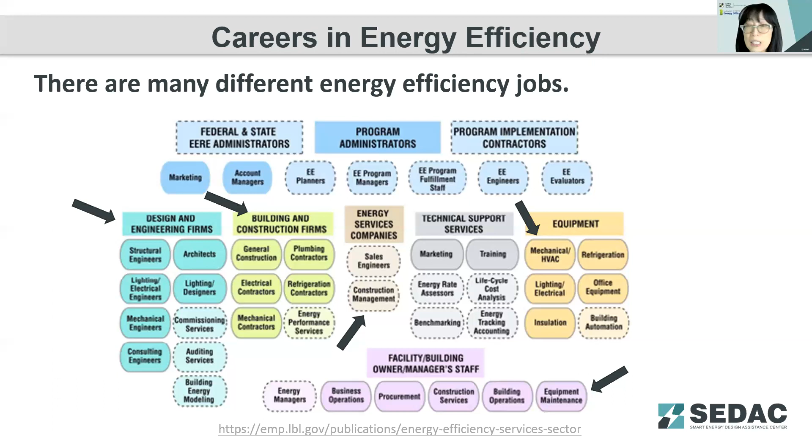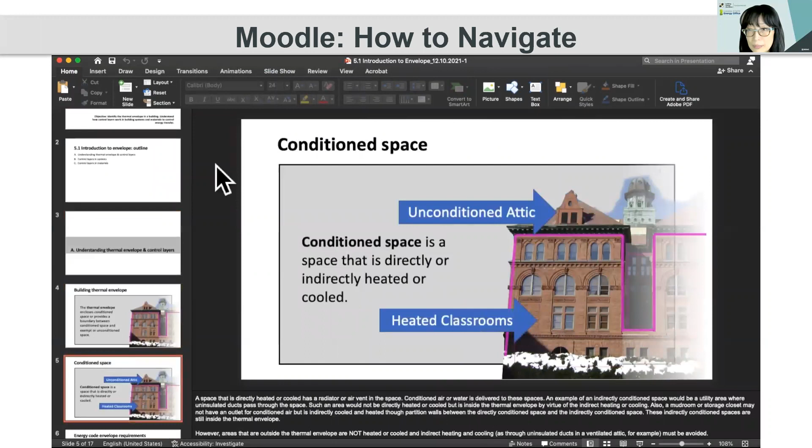Activities for this module are located in a special Activities folder. Worksheets can be assigned as homework or in-class activities. We've created a review game based off the popular TV show Jeopardy! This is a building control layers activity where students are encouraged to practice reading construction drawings and identifying control layers. There's an online quiz that students can take to demonstrate they have learned the material in the module. Students who receive a score of 70% or higher receive a certificate of achievement.

Have questions about our curriculum or how to use it? Check out our Q&A page where we address common questions, including what this program is about, what kind of content we include, how you can use the materials, and how you can contact us if you have questions.

That shows you a little bit of how you can navigate. I thought it would take time for me to navigate on the spot, so we just filmed a little video to show you how to navigate the Moodle, where you can find a lot of resources.

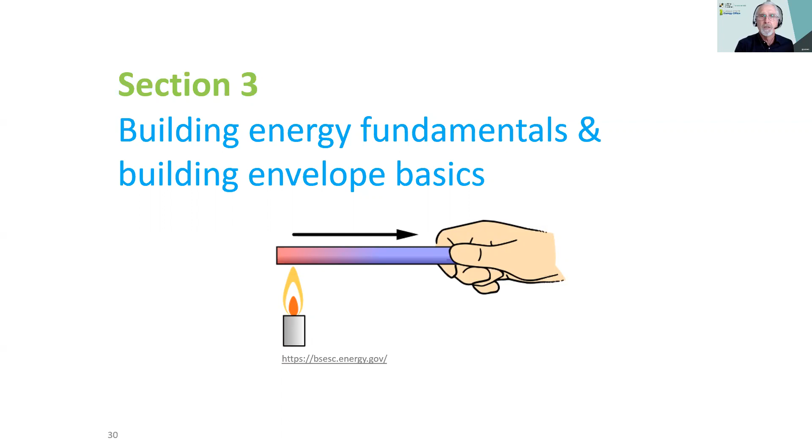So for the next bit of time here, I'm going to provide some highlights from several of the modules that Sumi just described. The first will be some of the building energy fundamentals and envelope modules. The goal here is to share some useful information today, but there's a lot there that we can't get through, of course. So I also want to give you a taste of what's there and inspire you to check out the full modules for more details on topics you find interesting.

So the first one is Module 2, Part 1, Understanding Energy and How It Moves. One basic concept that a lot of us are familiar with is the relation between energy and power. Power is the rate of energy flow, and it's equal to energy divided by time. Another way of looking at that is that power times time equals the energy used. So a kilowatt is a common unit of power, especially used for electric power. And if we have an appliance that uses 1 kilowatt of power and we run it for 1 hour, then we have consumed 1 kilowatt hour of energy.

Now, this may be obvious to you, but it's pretty common that people get these terms mixed up. So now you know.

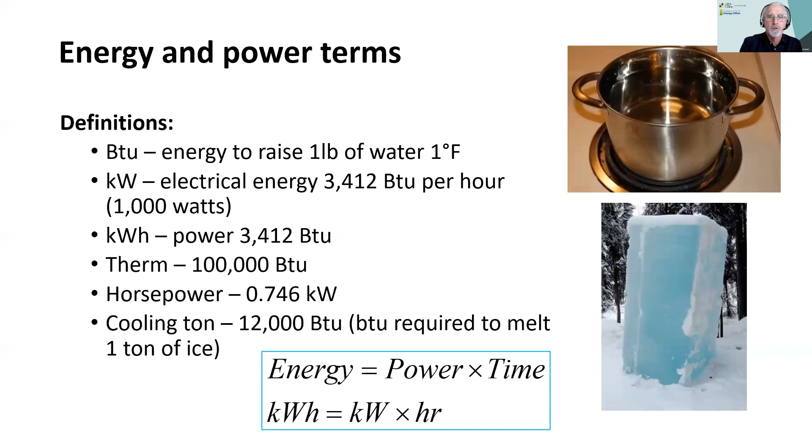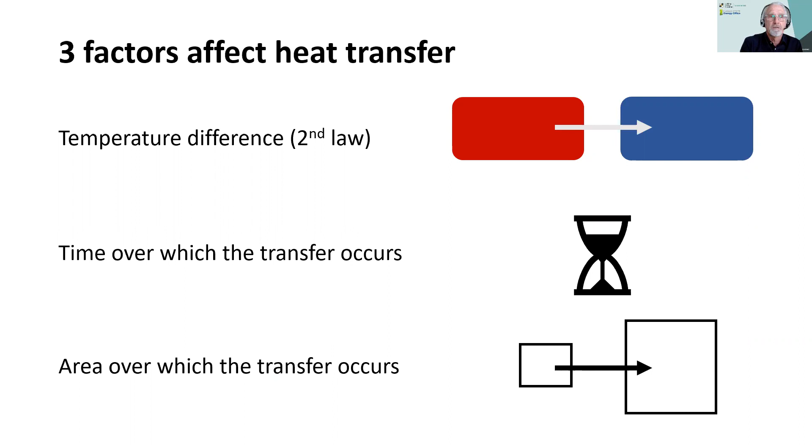Another aspect of the fundamentals is heat transfer. Knowing a bit about heat transfer can help us understand and evaluate different insulation systems and energy systems in buildings. Here are 3 factors that affect heat transfer: the temperature difference, the time over which heat transfer occurs, and the area over which that heat transfer occurs.

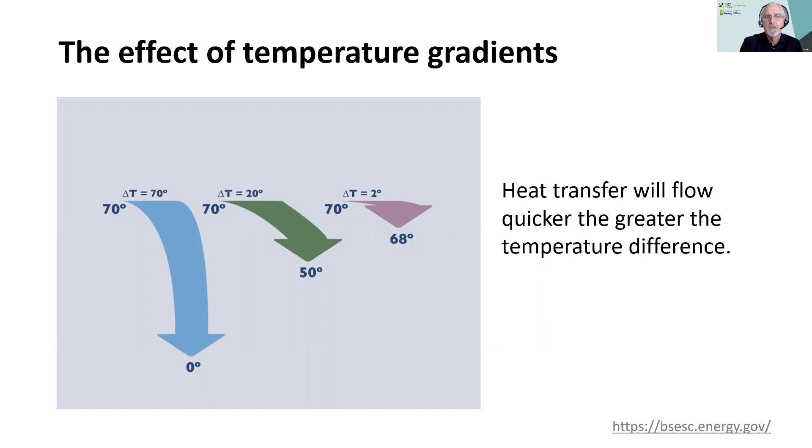The greater the temperature difference, the greater the heat transfer. We're often talking about the difference between indoor and outdoor temperature. This graph shows 70 degrees inside and 0 degrees outside. That's not so applicable to Hawaii, of course, but you also get heat gain when the temperature outdoors is higher than the temperature indoors on a hot day.

The greater the time, the greater the heat transfer. So if you have a rate of 100 BTUs per hour of heat transfer, then over 3 hours, you've accumulated 300 BTUs, of course.

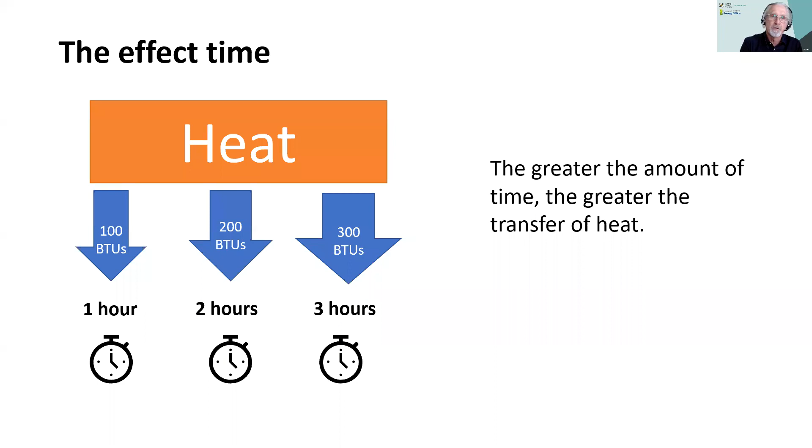And then the larger the surface area, the more heat transfer. So if you have twice as much surface area, then you have twice the rate of heat transfer. It's a very simple relationship.

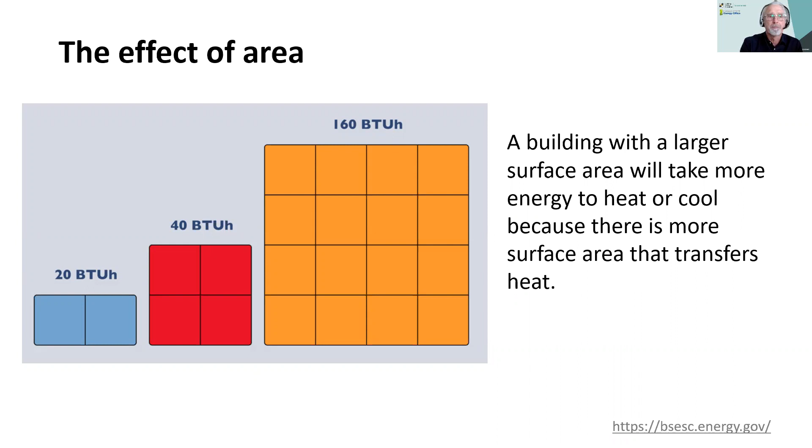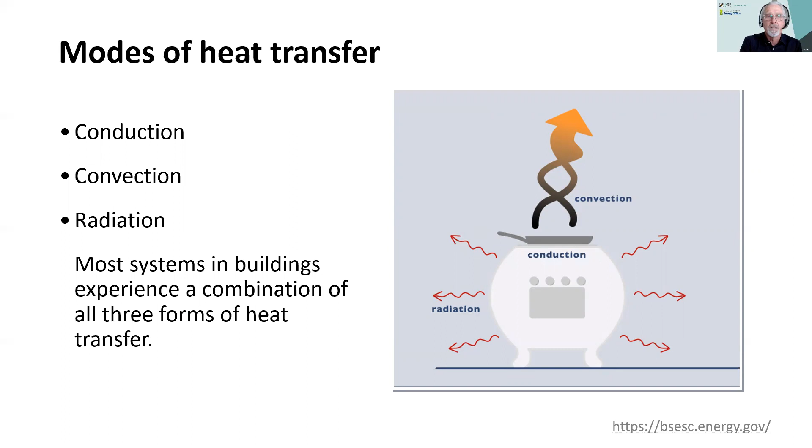So then how does that heat move? It moves through space or through building assemblies like a wall in 3 ways: by conduction, convection, and radiation. All three of these will happen in buildings. In part 2 of this module, there's more information about these methods of heat transfer. First, let's talk about conduction.

This is heat moving through a material or through materials that are in direct contact with each other. I think we've all experienced conduction. Different materials have different thermal conductivity. If we had time, we could talk about ranking all of these materials, but some materials are good conductors of heat, like metal, while other materials have low conductivity and are useful for insulation. We take advantage of these properties as appropriate.

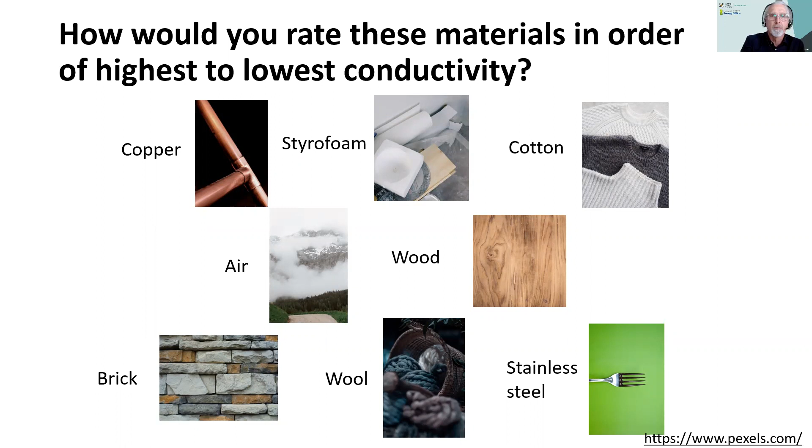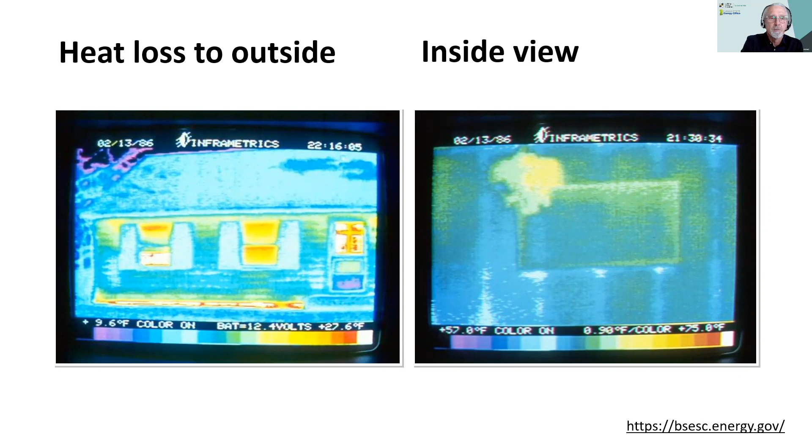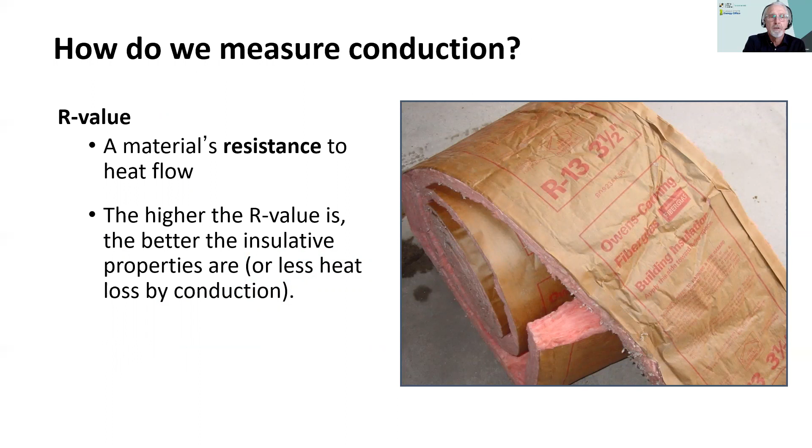So how do we measure conduction? A material's resistance to heat flow is defined as its R value. Here you see R13 printed on a batt insulation product. Of course, the higher the R value, the more insulative the material is.

To calculate the heat flow through the envelope, we define the U value, sometimes also called U factor, which is the thermal transmittance of an assembly, like a wall or roof. It's the reciprocal of the R value, or 1 over the R value, so the lower the better for reducing heat transfer. An assembly with an R value of 1 has a U value of 1. An R value of 4 is equal to a U value of 0.25, so it would have 1/4 the amount of heat transfer as the R1 material.

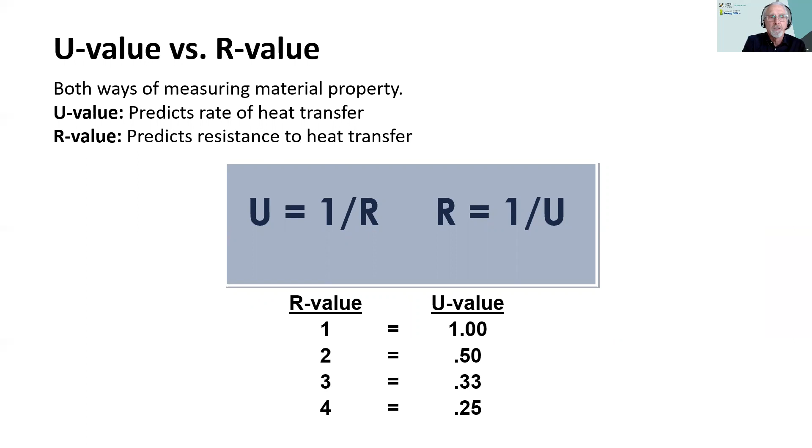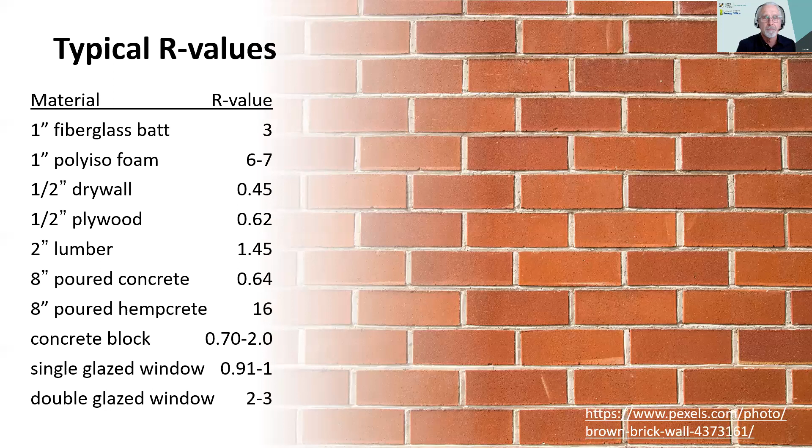If we want to calculate the rate of heat loss from a building, or more importantly for Hawaii, the heat gain to a building when it's hot outside, we can do that if we know the U factor of the construction, the area of the surface, and the temperature difference between inside and outside. If we consider a period of time, we can calculate the total amount of heat that passes through the wall, window, or roof. The formula is U factor times area times delta T, the temperature difference between inside and outside, times time. Using these units, we get Q, the heat transfer, in terms of BTUs.

So that's a bit about conduction. There's a lot more information in the modules that I encourage you to check out.

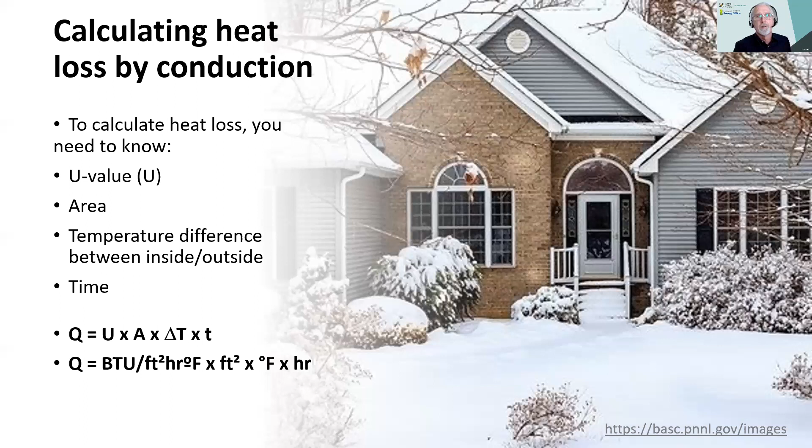The second type of heat transfer is convection. One example of convection is infiltration caused by wind pressure. In Hawaii, for an air-conditioned home, warm, humid air that leaks into the building adds heat to the space and increases the energy consumed by the air conditioner. That's unwanted infiltration, it adds to energy use.

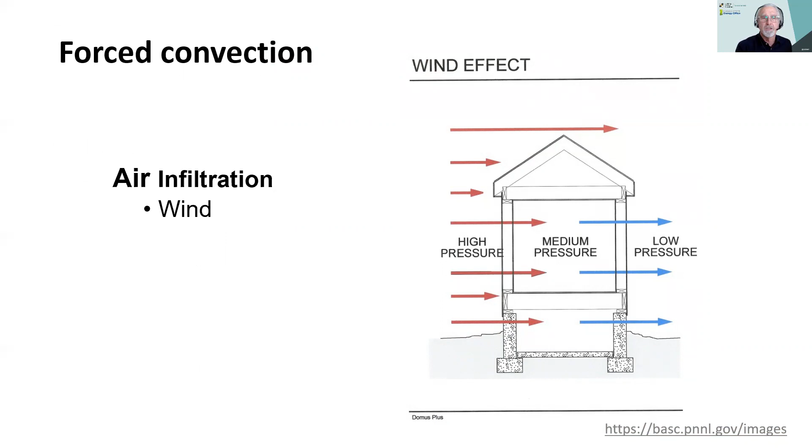Here you can see an example of unsealed penetrations. There'll be all sorts of wire and pipe penetrations and potentially duct penetrations and others that go through the ceiling. Like I said, these can add up to big holes if we don't pay attention to them.

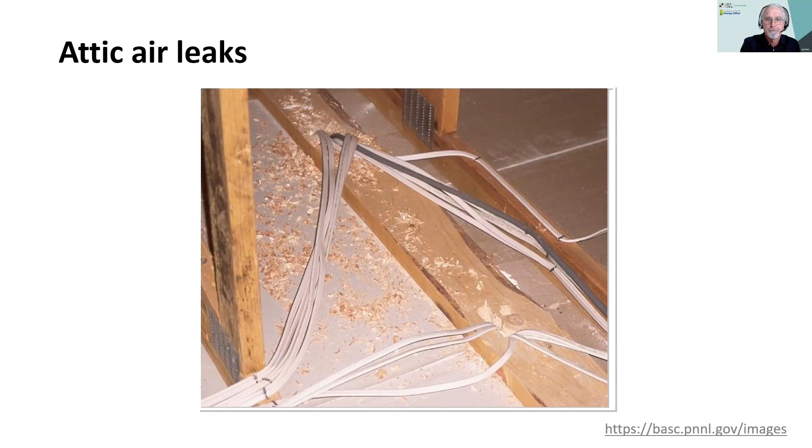Then there's radiation, the third heat transfer mechanism. This one's especially important in warm climates like Hawaii, because it can affect our comfort as well as our AC energy consumption if we have an air-conditioned building. The radiation from the sun heats the surfaces of our buildings, and those warm surfaces conduct heat through the walls and the roof, which increases cooling load. A portion of the radiation also passes directly through windows and heats the spaces directly. So those are two paths that the sun's radiation takes to get into the building.

There's also radiant heat transfer that happens inside the building. When the roof is heated by the sun, it re-radiates heat down onto the ceiling below. More than half of the heat getting through the roof and ceiling is due to that radiant heat transfer between the roof and the ceiling below. The warm ceiling then radiates heat onto the occupants below and affects our comfort.

Understanding the impact of this radiant heat is useful for identifying good strategies to keep homes cooler, such as reflective exterior surfaces or shading your windows from the sun with overhangs or other shading devices, especially valuable in Hawaii.

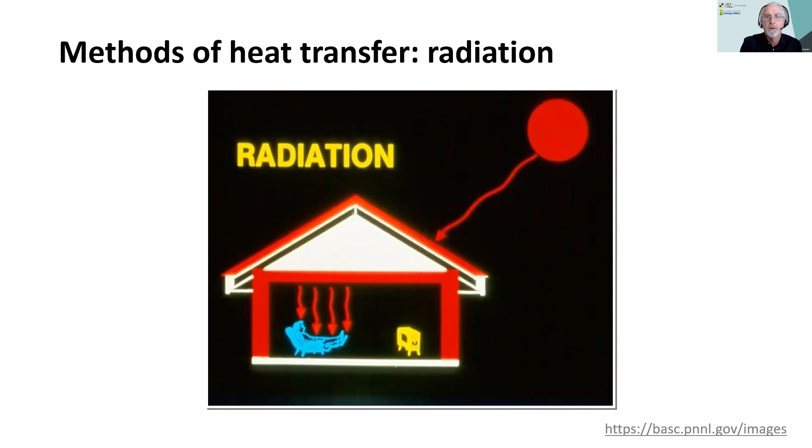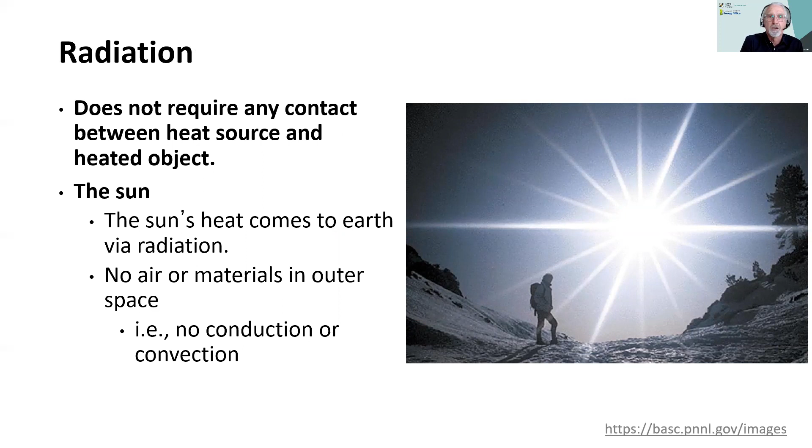The thing that makes radiation different from conduction and convection is that there's no contact between the warmer object, such as the sun, and the cooler object, meaning you. You are all very cool. Conduction, on the other hand, is through direct contact with materials, and convection is transferring heat from one object to another due to movement of a fluid such as air. So that's our conduction, convection, and radiation fundamentals.

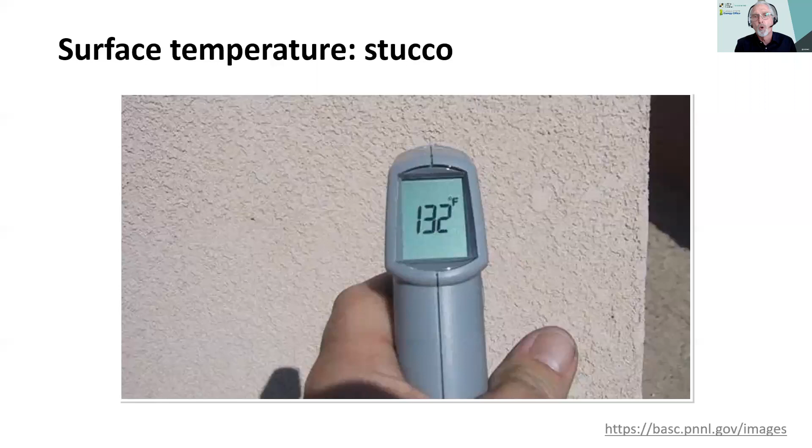This is an example of the impact of solar radiation. This wall is absorbing some of the radiation that hits it, and it's heating up higher than the air temperature, to 132 degrees. This darker wall in the sun is at 171 degrees, because it has a lower solar reflectance than the previous case. So you can see that surfaces in the sun can get really hot.

A good strategy to keep a home or any building cooler is to use exterior surfaces with a high solar reflectance. That's why you see some roofs with white coatings. They reflect a large portion of the sun's radiation and keep the surface much cooler.

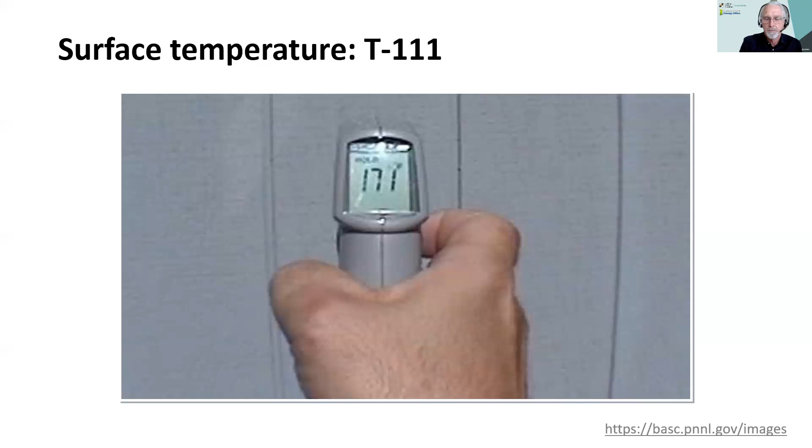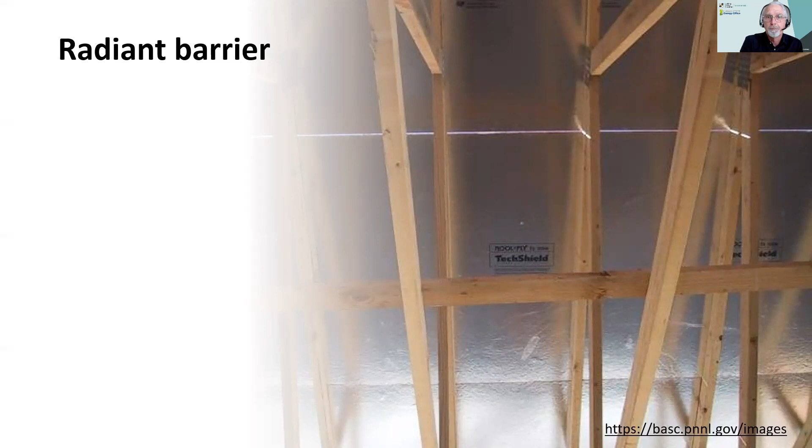All right, so that's a little bit about fundamentals. I'd like to give a quick tour, if it's okay with you, on this module 5, the part that talks about radiant barriers and thermal bridging, because thermal bridging is a very important topic.

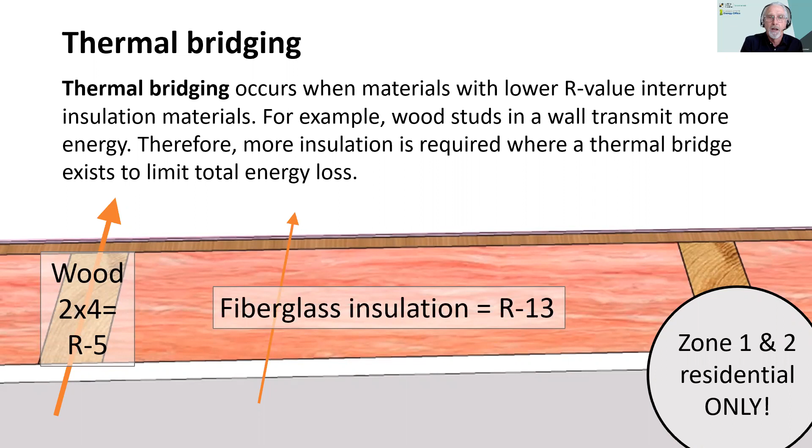Thermal bridging happens when you have a framing material like wood, shown here, that has a lower thermal resistance than the insulation. Here the wood equals about R5, the insulation about R13. So that framing causes the overall performance to be somewhat worse than the insulation alone. With wood framing, it's not a really big penalty, and this example would actually comply with the energy code in Hawaii for homes. But if you have metal studs, which is pretty common in Hawaii, that high conductivity of the metal makes the thermal bridging much more extreme, and it cuts the effective R value of the wall by more than half. So instead of getting an R13 wall, you're maybe getting like an R6 wall.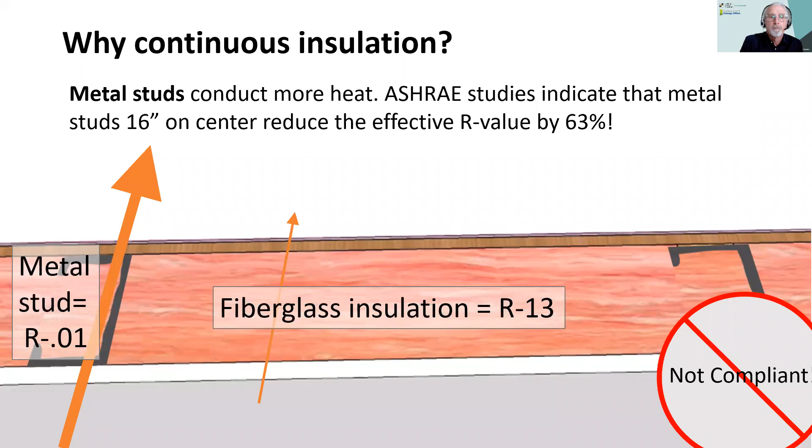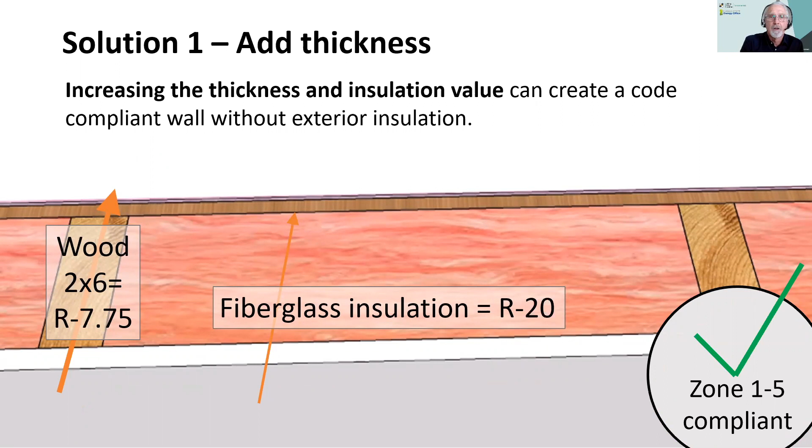So what do we do about that? One solution is to try to add thickness, so here a 2x6 frame instead of a 2x4 frame. But if you have metal studs, that doesn't really help all that much. So with metal framing, a more effective solution is to use continuous insulation. In this example, there's an R5 layer of rigid insulation attached to the outside of the framing. As we'll see in a minute, it's commonly used — we commonly use rigid board insulation, foam board, for this continuous insulation layer.

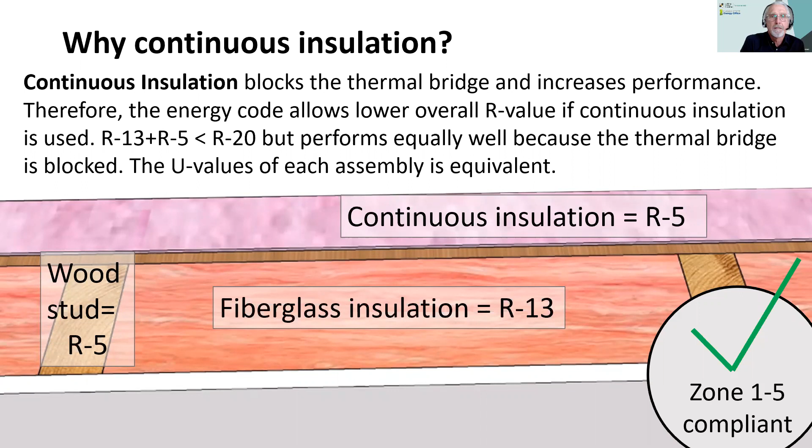So that's a quick tour on thermal bridging. Not as important or as big of an issue in Hawaii compared to, say, Chicago, but it still has a significant impact on heat transfer, and it's important to pay attention to.

So why do we really care about leaks in Hawaii? Like I mentioned, this isn't Chicago, it's not 0 degrees outside, you don't have 0 degree air leaking in. Why is it important? Well, in Hawaii, more and more homes are getting AC and being built with AC, and air leakage in an AC home can cause two problems. One obvious one is wasting energy — you have to use more cooling energy. The other is moisture damage and mold growth. If you have that warm, humid air coming in through cracks in the envelope, when that air comes into contact with a cool surface on the inside of a wall, for example, there's the potential for condensation and mold growth, and we obviously don't want that. So helping to control infiltration reduces the chances of that happening.

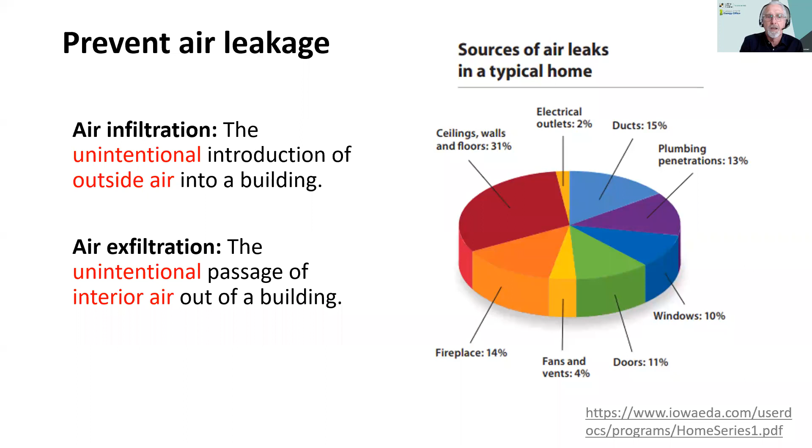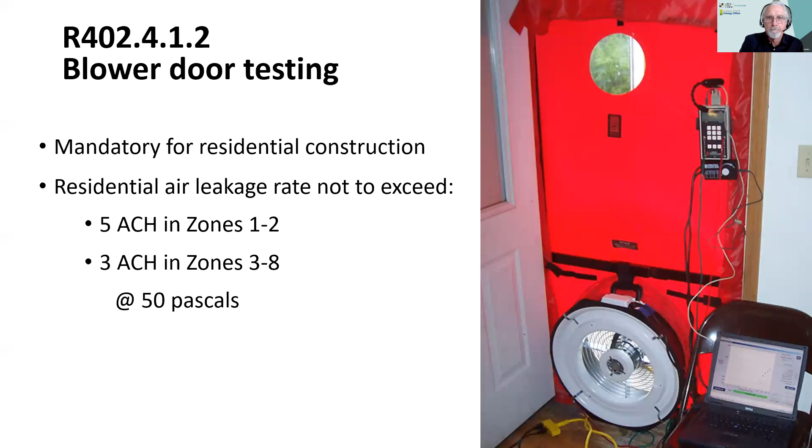Okay, so that's thermal bridging and air barriers. So are you up for taking a quick tour of walls and windows? Obviously you don't have much choice, but I'm going to dive into it anyway.

If you check out the online education module, you'll see there are several ways to insulate a framed wall. There are different materials, different types of insulation, and different locations, and these choices have both performance and cost implications.

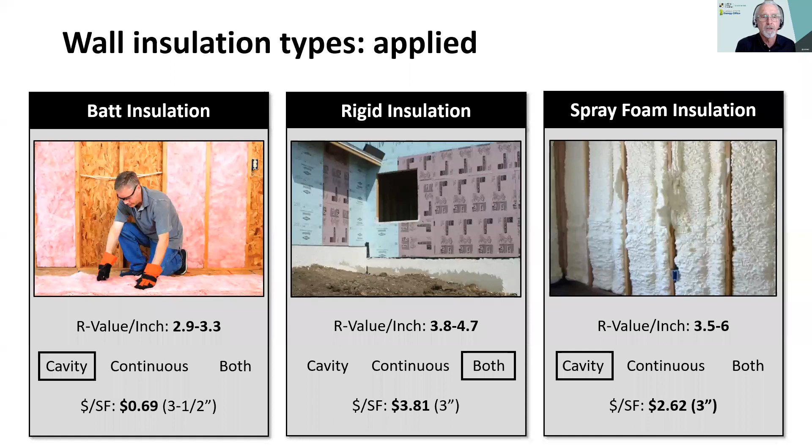So you see on the left, batt insulation in a cavity. In the middle, rigid insulation installed as a continuous barrier. And on the right, spray foam insulation also in the cavity. Each of these can be an appropriate solution, but again, they have different costs and performance implications.

So I mentioned continuous insulation. We classify insulation location as either continuous or cavity. The idea is that continuous insulation is mostly uninterrupted by thermal bridges. I say mostly because there are often fastenings, screws, or other kinds of clips holding it in place that do create some thermal bridging, so we need to pay attention to that. But in general, it's fairly continuous.

The cavity insulation is generally cheaper because you already have the cavity there. You just fill it with some insulation, but as noted, it suffers from potential thermal bridging problems.

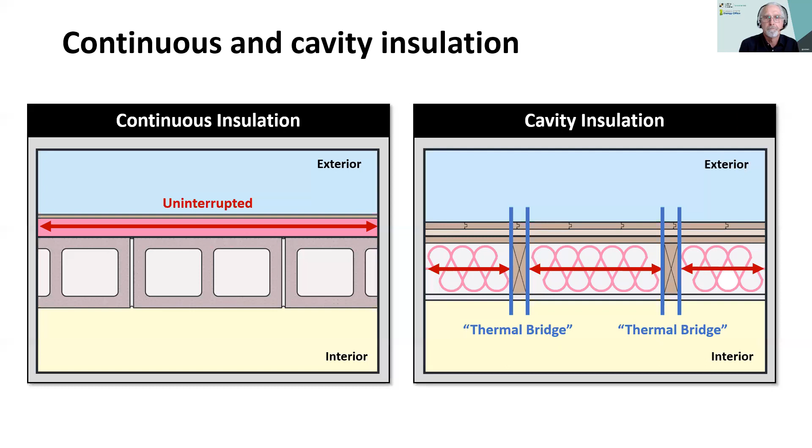Then there's windows. When we look at window performance in a climate like Hawaii, as I'm sure a lot of you know, the most important characteristic is the solar heat gain coefficient, because we're usually trying to keep the sun's heat out of the building and avoid extra cooling energy. The SHGC is a number that represents the fraction of the sun's total heat that makes it through the window into the space, and in warm climates like Hawaii, a lower number is better.

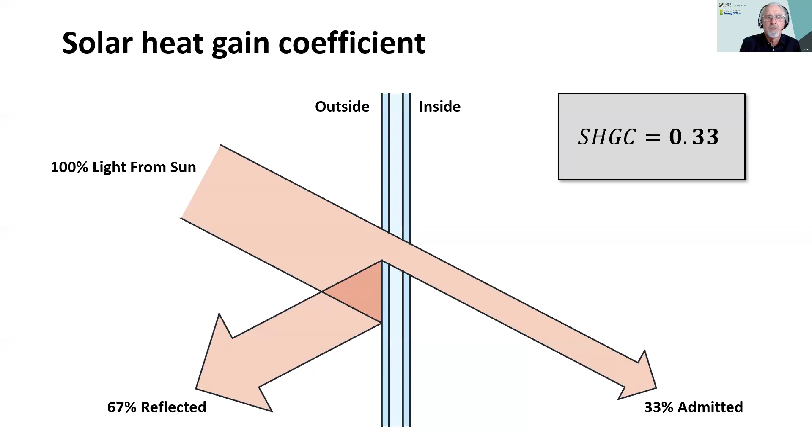As we'll see in a few minutes, the energy code limit is 0.25 for air-conditioned homes. That means 25% of the solar heat gain that strikes the window makes it through to the inside.

But a U factor is important also. On a hot day, say it's 90 degrees outside, the heat's going to flow through the window from that 90-degree temperature outside to say 75 degrees inside. So a lower U factor means a lower rate of heat gain and again, lower AC bills. Both are important, but really pay attention to the SHGC.

And then finally, for envelope, we've got roofs and ceilings. Just like with walls, there can be different locations for the roof insulation depending on the type of construction. The roof exterior surface is always the bulk water control layer, but the thermal layer and air control layer can be at a different location.

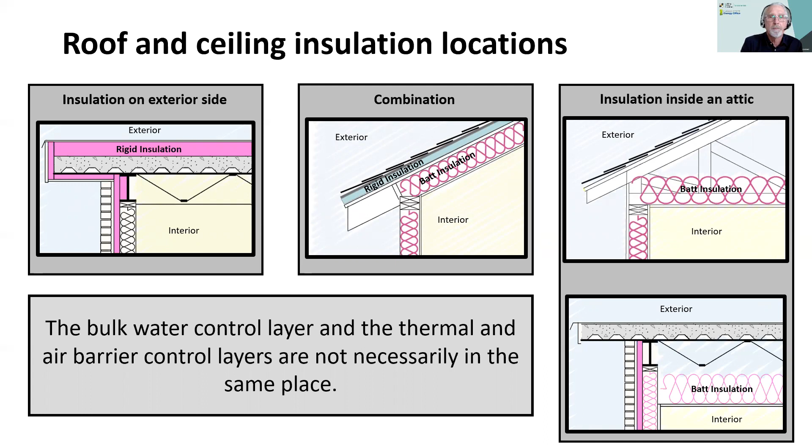Traditionally we'd put insulation on the ceiling or the floor of the attic, that's the thermal and air barrier. But more and more people are putting insulation up under the roof. That's the encapsulated attic example shown here.

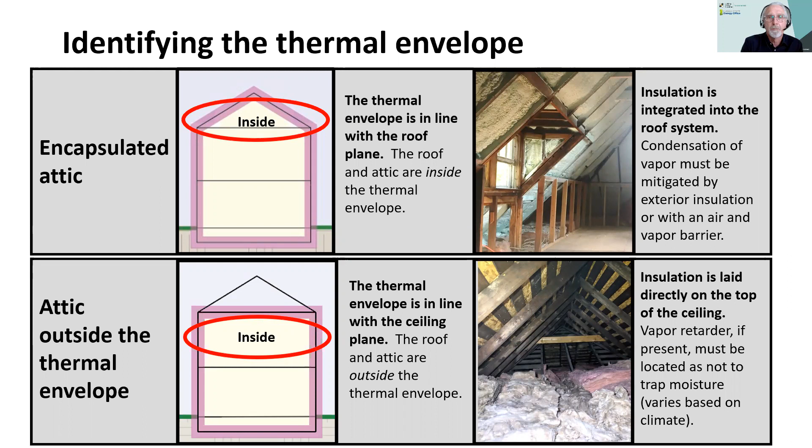As far as the materials we use, if we have insulation on the ceiling, then it's typically either loose fill or batt insulation. They provide similar performance. The loose fill is generally a little bit quicker and cheaper to install, so that might be a little bit more common.

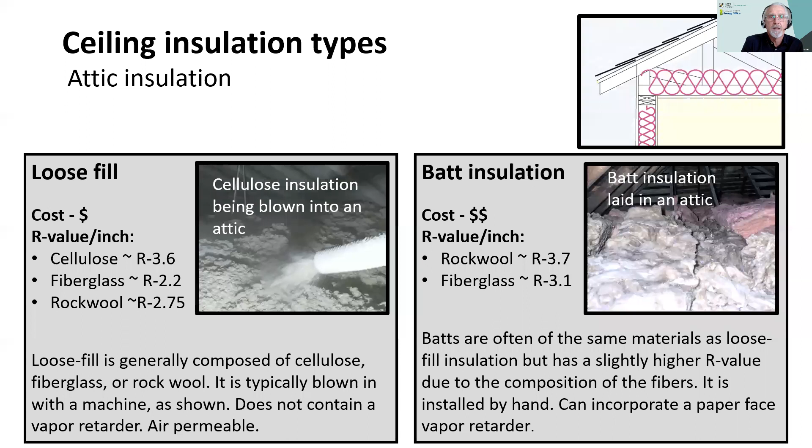And then exterior insulation, that's typically foam board. The important thing to know there is that there are a couple different types of foam that are used, which have trade-offs in terms of performance and water resistance. So check out the materials on that.

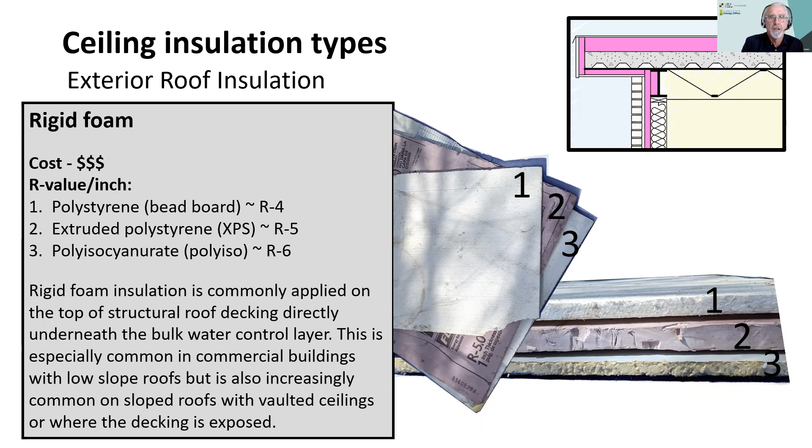And as I noted earlier, spray foam is becoming a little bit more common. This could be a bit more expensive than other options, but it provides some additional benefits. You get a little bit more indirectly conditioned space in the attic, and it also provides air sealing, so it reduces air leakage much better than other types of insulation.

So that's our quick tour of the materials you'll find on the Moodle site related to building energy fundamentals and envelopes. I suggest that you check out those. There's a whole bunch of extra material there, as well as the activities and exercises that Sumi described earlier.

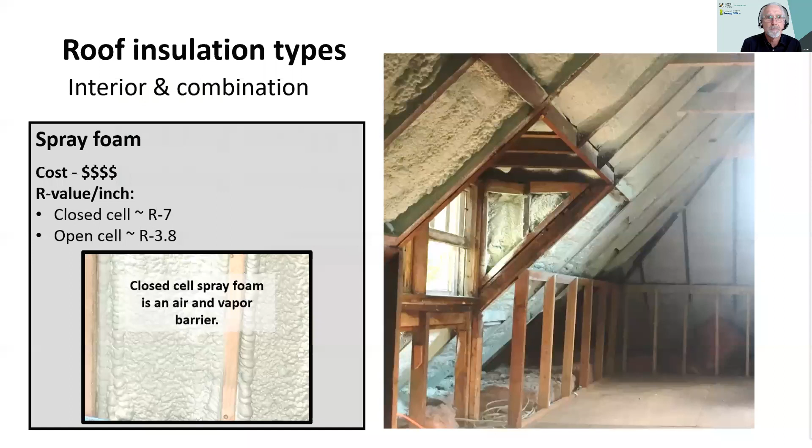Now I'd like to take a few minutes to talk about energy codes. There are a couple modules on the online Moodle site related to energy codes. We're going to take a quick look at the first two, 3.1 and 3.2: what are energy codes and standards, and what is the purpose of energy codes and standards?

First of all, energy codes are one of many building codes. There are also fire codes, mechanical codes, plumbing codes, which can vary from one county to the next, but it's one of many different codes that apply to buildings.

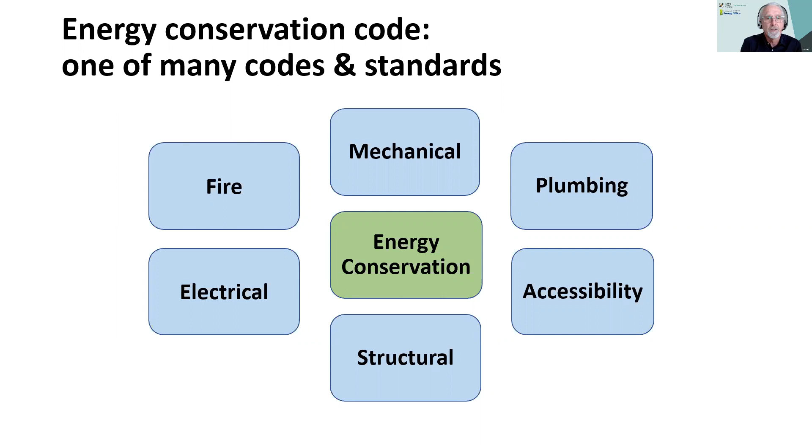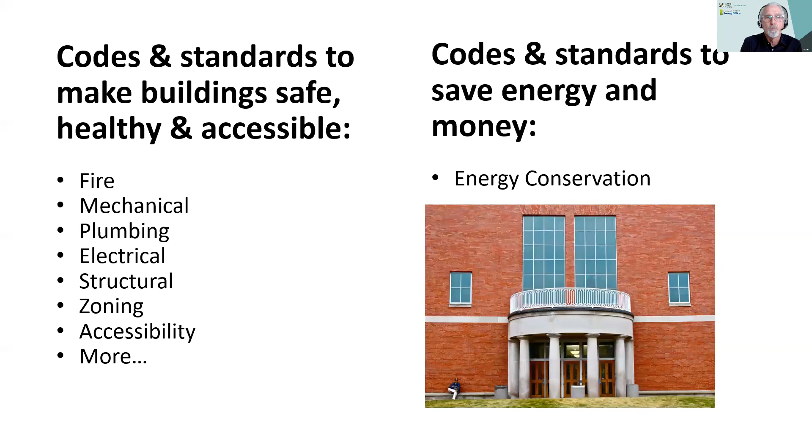Most building codes help protect the health, safety, and welfare of building occupants - that's their primary role. Energy codes are unique in that they're also there to help protect building owners, users, and tenants, save energy and money, and, as we're more aware these days, help mitigate climate impacts.

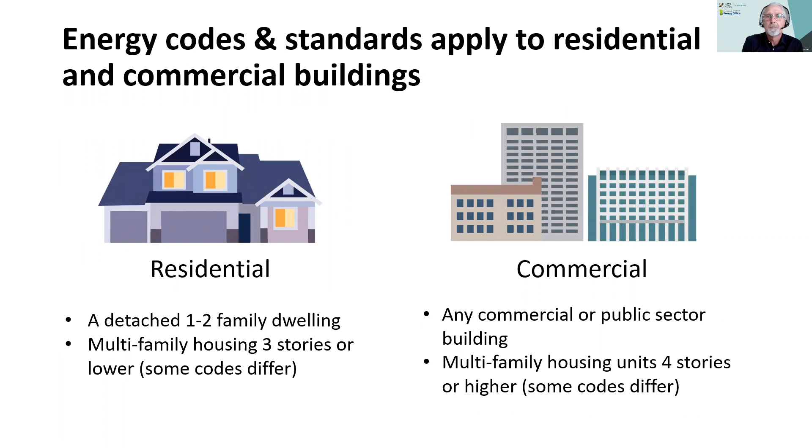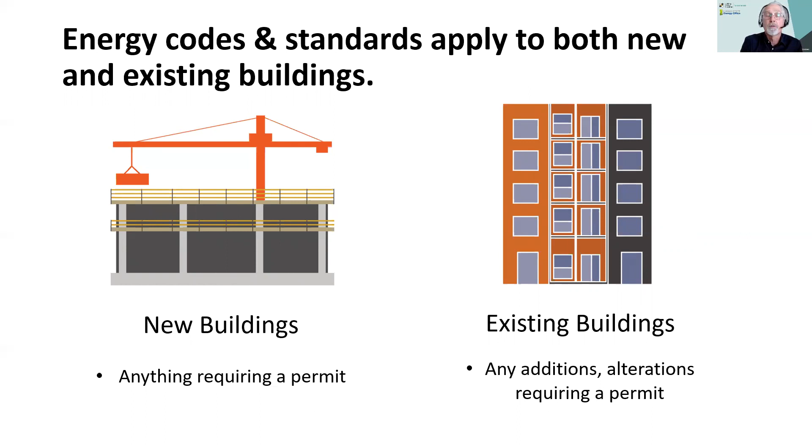Pretty much all energy codes apply to both residential and commercial buildings, with separate requirements for each type. They also apply to both new buildings and existing buildings. For existing buildings, this can include an addition - it's obvious that needs to meet the code - but it also can apply to alterations, so if you add a new window, it may need to meet the performance requirements of the code. It's not just new buildings, it's also existing buildings.

And then finally, energy codes affect design and construction. They cover the envelope - wall, floor, ceiling, doors and windows. They cover heating, cooling, and ventilation systems, and typically also lighting and water heating. That means there are some things they don't cover, some things that use energy, like many appliances - refrigerators, cooking appliances - or all those plug loads that occupants bring into the building and plug in. In most cases, those are not directly covered by the energy code.

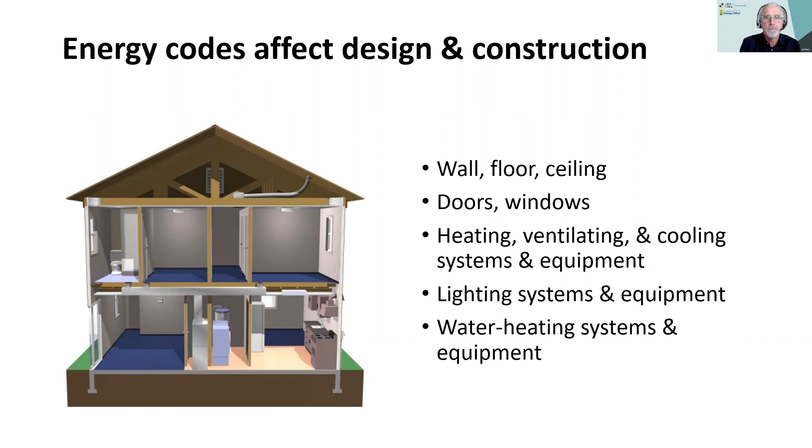And why should we care? Why do these exist? Well, as Howard mentioned, there are climate challenges facing us, and buildings make up a significant fraction of total US greenhouse gas emissions. So energy codes try to contribute to reducing that fraction.

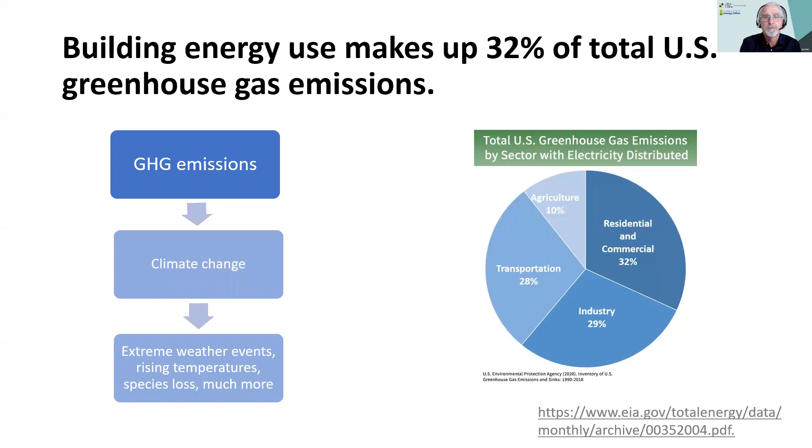They also help to avoid lost efficiency opportunities. It's always easier and much less expensive to build for energy efficiency from the start, rather than trying to go back after it's built and retrofit systems. So that's an important role of energy codes.

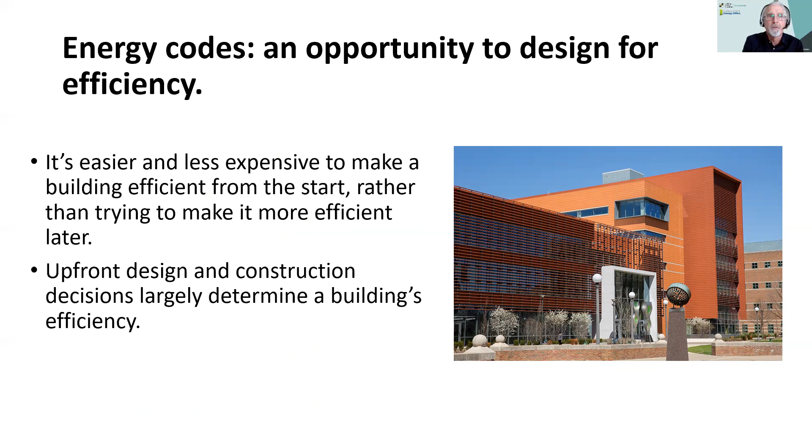And then finally, energy codes help reduce the financial burden on households. In many cases, the amount of money people spend on energy bills is a big part of their total household income, and the energy code can help mitigate that. It's important to note that the energy code represents the minimum performance required by law, and there are opportunities to go far beyond it in terms of efficiency, but the idea is to help avoid the worst lost opportunities and the worst performance.

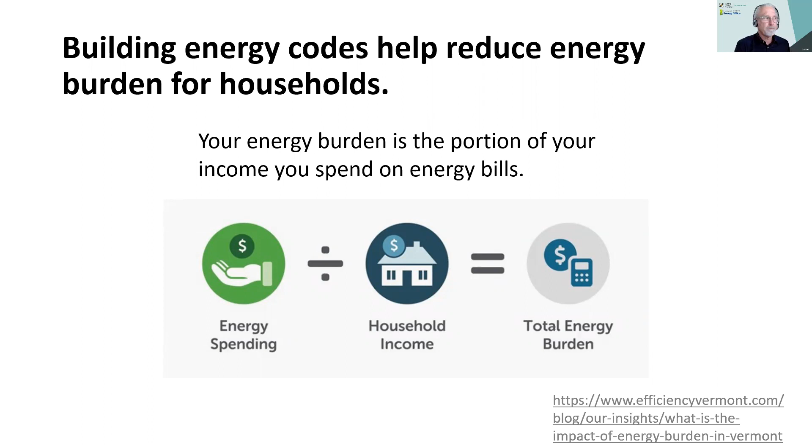And so I'm going to leave the building fundamentals modules now and just take a quick look at the energy code in Hawaii.

In 2020, I guess it was, the state adopted the 2018 International Energy Conservation Code, and it also adopted amendments that add some flexibility appropriate for Hawaii's conditions. As we'll see on the next slide, in the state of Hawaii, each county goes through its own adoption process and may have additional amendments that apply to buildings in their jurisdiction.

This chart shows how the stringency has increased with each three-year update of the IECC, and it shows some dramatic improvements. These first codes were established around the time of the energy crisis in the 1970s, and since then there's been significant improvement in building performance. But this chart also shows that we still have a lot of work to do in terms of achieving better performance.

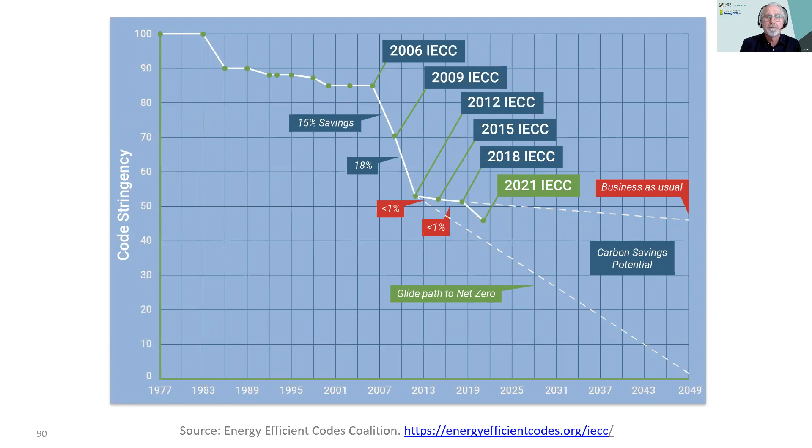So you can get a feel for the energy code in Hawaii, I'll give a quick overview for low-rise residential buildings. In a minute I'll show you links to some recorded webinars with more details about both the low-rise residential and commercial code requirements. These are the things covered by the energy code.

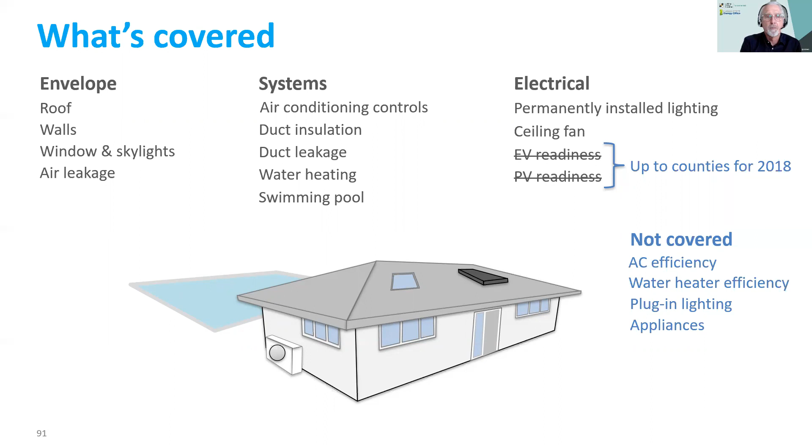There are four compliance options. One that's really important for Hawaii is called the tropical zone option, and it applies if your building is less than 50% of the floor area air conditioned. Otherwise, there's a prescriptive path where there are tables of performance that you need to meet.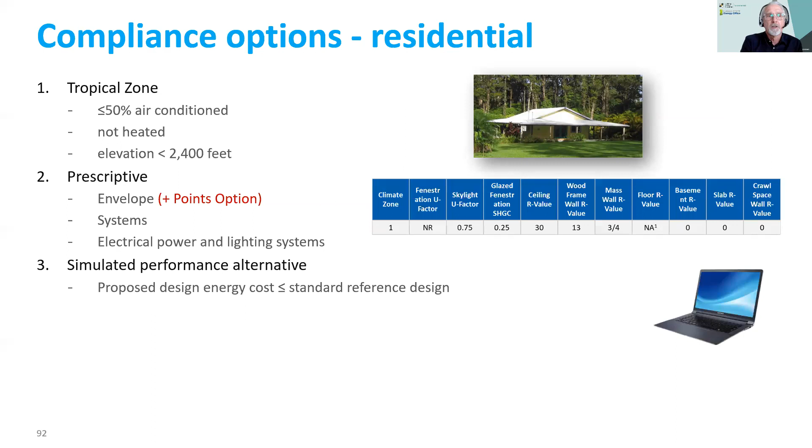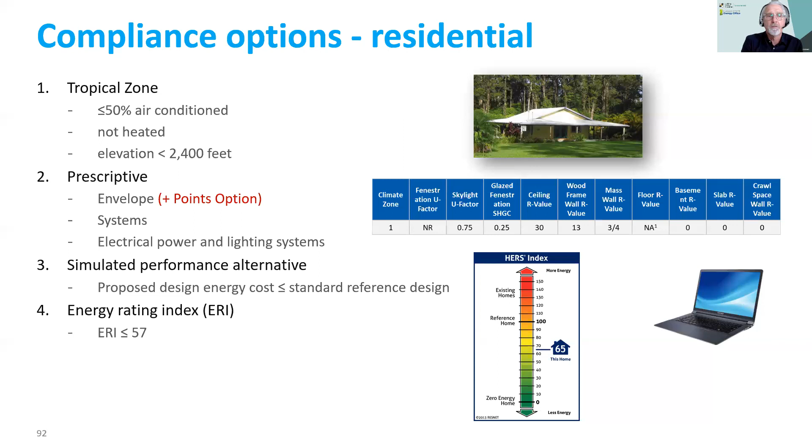Then there are two computer paths. One's called the simulated performance alternative, where you use a computer model to show your building's no worse than the standard reference design. And then there's a newer one called the energy rating index, also a computer method, which rates the performance of your building compared to a reference and gives you a score. You need an ERI of no greater than 57 for a home to comply in Hawaii. So you have some flexibility in the compliance paths you choose.

If you choose that prescriptive path, so for example if you have an air-conditioned building or home, you would follow this path.

This is some of the things you'll need: R30 or greater roof insulation, window heat gain coefficient of no greater than 0.25. You can see the requirements for wall insulation, envelope leakage testing—that's the blower door testing I mentioned—and a number of other things, including duct air leakage testing, that's pressure testing of the ducts to make sure they're sealed reasonably well.

You'll note it also says a point system allows some flexibility. That's in the Hawaii amendments, and it gives you some alternatives for envelope requirements—like you might be able to get away with R19 instead of R30 roof insulation if, for example, you used a cool roof, a solar reflective roof surface.

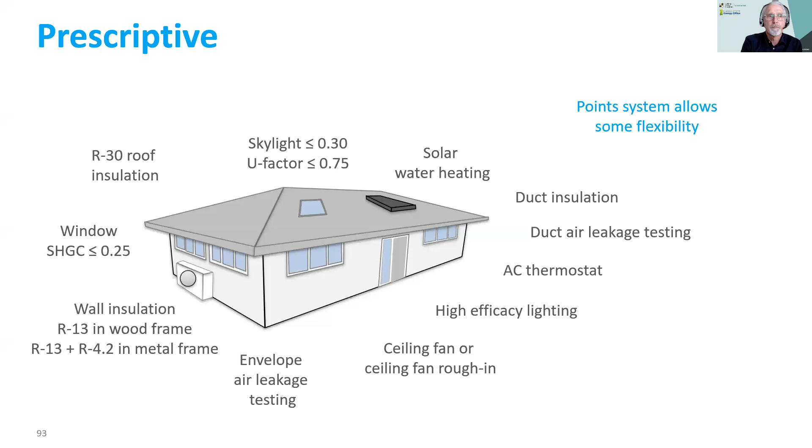Now, if you don't need full AC, you can follow the tropical zone path, and the envelope requirements are less stringent—leakage testing is not required. The big difference is it requires actual minimum opening areas for natural ventilation, defined as openings at least 14% of the floor area in each space. But it's a set of requirements that are pretty appropriate for many parts of the island where you don't need full AC.

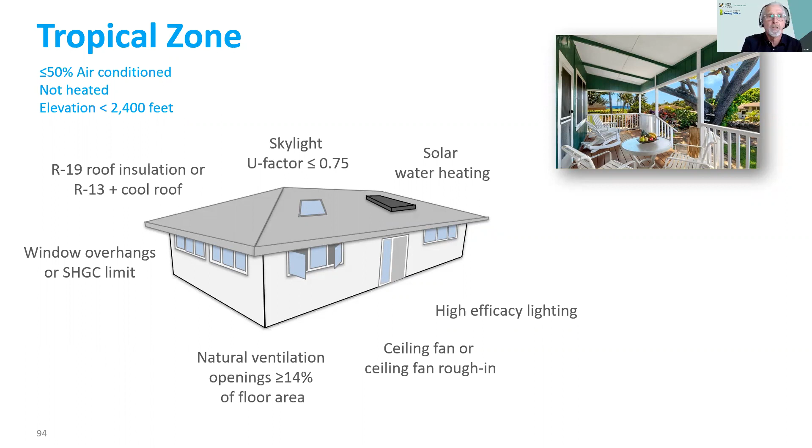All right, so I know you want to learn more about the energy codes. First up, I encourage you to check out these checklists. This is the residential checklist, available for download from the State Energy Office website. This is just the first page, it shows you the compliance alternatives.

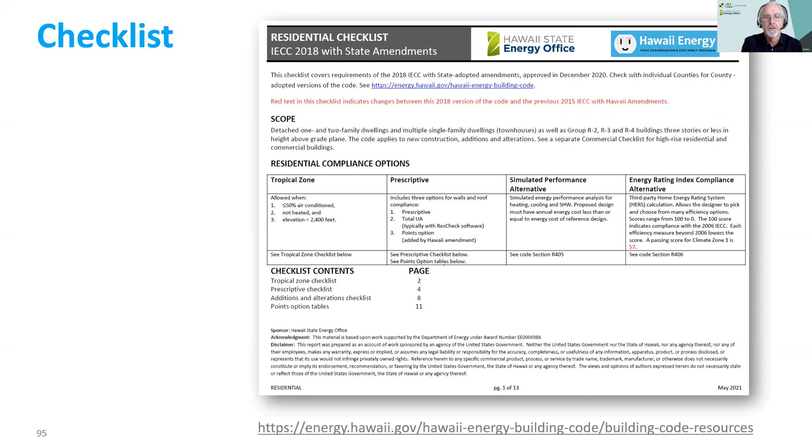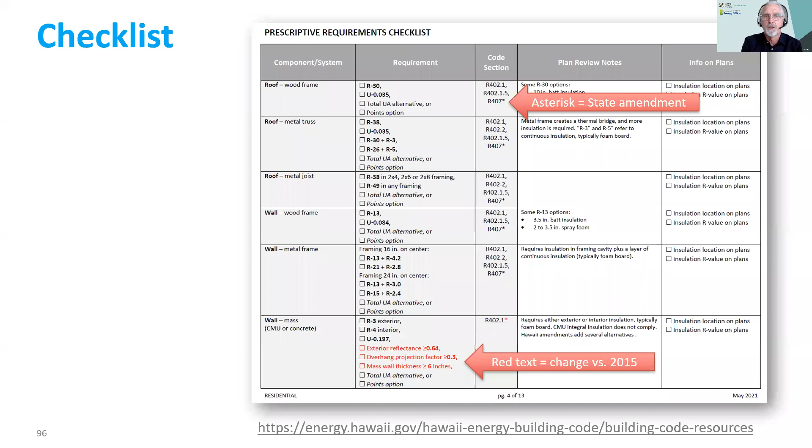This is the second page that lists some of the requirements. You'll see the component, like roof, what the requirement is, and in cases where there are options it'll show that, listing the relevant code section and maybe some additional notes. For those of you familiar with the 2015 existing code, it highlights in red the things that changed in the 2018 code, so that can be very useful.

And then lastly, I mentioned these two webinars. If you go to the State Energy Office website, the link shown here, you can find two webinars from May of last year that provide more details about the code requirements, both low-rise and commercial.

So I appreciate your following through that quick tour.

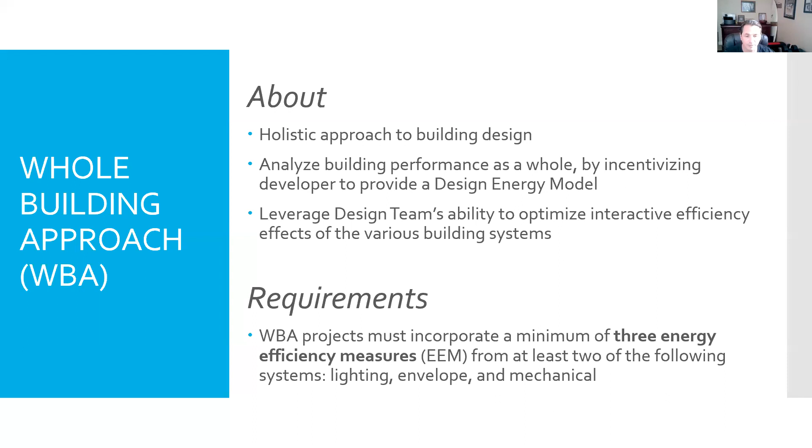As far as opportunity, whatever's available in Hawaii, we have to work with a variety of different areas. I know there's a lot of architects here today, developers, and students coming in. What we have to do is continually find those counterparts we can work well with, and find out how to get in very early, because we know designs sometimes start several years before construction.

A far less complex approach is our systems approach. When an energy model cannot be provided, either due to timing or because the project simply didn't warrant one, we use the energy code standards and minimum requirements, and we're able to assess the systems that are going to be installed to find out the KW and KWH savings on an annual basis as well as a lifetime basis, to figure out what the incentive might be for that developer.

If we're looking at a single family home, we'll work with a developer who's going to build 10,000 homes over several years, and these requirements will change. On a minimum level, our current standard is the home needs at least 85% LED lighting, and at least half of the appliances need to be ENERGY STAR certified. These are custom programs, so if you meet the base requirements, we can look at optional incentives, like HVAC systems with a very high SEER rating, ENERGY STAR certified smart thermostats, whole house fans, and custom energy efficiency systems that exceed code — for example, solar water heating on a multifamily project, which at the time wasn't required.

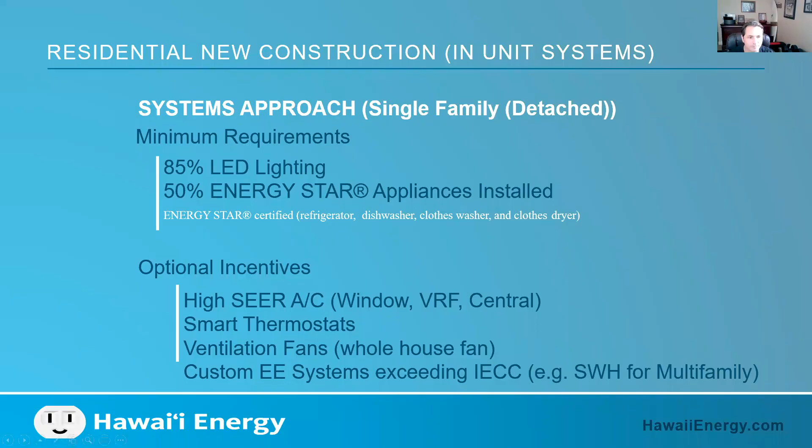Here's an example of a project we're all very proud to have worked on. D.R. Horton built Kulia at Ho'opili, designed with efficiency lighting, appliances, HVAC, and solar water heating systems, all of which exceeded code for this multifamily property.

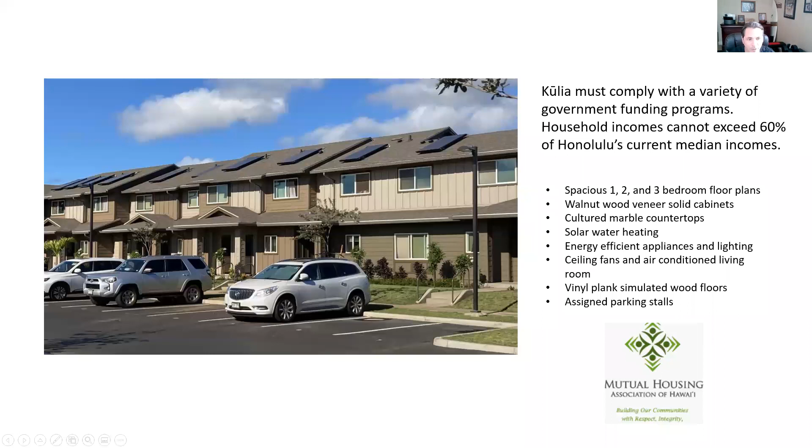So Kulia is an affordable rental property, very nicely appointed, especially if you've ever worked within affordable housing over the years. There's been many built, but this is by far one of the nicest projects I've had the opportunity to work on in that arena. Mutual Housing is offering affordable rents, and because they designed the property with solar water heating for that multifamily complex, families get to enjoy savings on not only rent, but also utility costs. In addition, they actually have air conditioning, which I don't see a lot of in affordable rentals. So that's a great project, and I'm very proud to have worked on that one.

I want to shift gears here for a second and briefly discuss some of the programs I get to work on that are for existing builds and more of community and event action type programs. To truly make an impact in a community, we have to collaborate with a multitude of partners, managers, vendors, contractors, property owners, and we might start with energy workshops.

Then where I come in is our Energy Smart for Homes, which is a free in-home energy efficiency retrofit. At the time of installing those free measures, we're able to assess some of the additional systems in the home, such as refrigerator, washer, dryer, air conditioning, and water heating systems, to see if they might be eligible for additional savings from some of the other programs I get to manage as well.

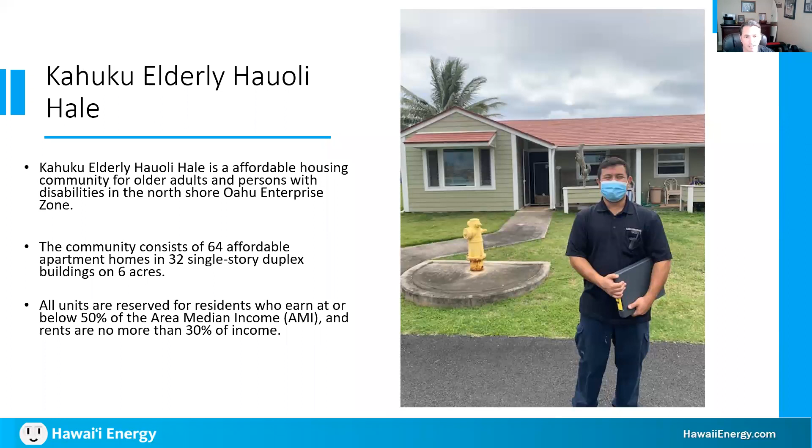To give you an idea, Kahuku Elderly is an affordable housing community for older adults as well as persons with disabilities. There are 64 units, offering 50% of area median income or lower, and the rents can't exceed 30% of income. With projects like this, we get to come in and provide a lot of manpower, and we bring whole teams together in order to provide these energy efficiency efforts.

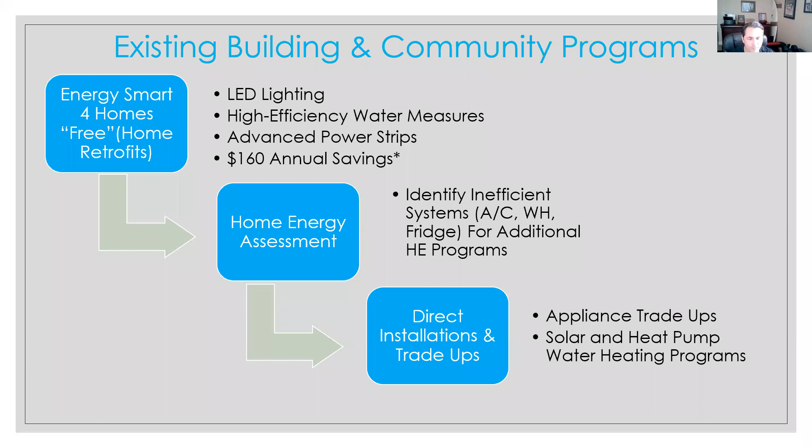So how it works: when we're able to get into a facility such as Kahuku, we go in, we retrofit, and we provide the home energy assessment. We'll look at the various other systems - AC, water heating, fridge, etc. For communities such as Kahuku, where they'd be eligible for additional subsidy from our programs, we could provide appliance trade-ups, solar, and heat pump water heating type programs as well.

What we were able to provide Kahuku Elderly was a refrigerator trade-up program. Of the 64 units, we identified 56 that would be eligible for new Energy Star refrigerators. We estimated first year savings for all the replacements at about 45,000 kWh, direct savings to those tenants, and over the lifetime of the unit, about 380,000 kWh. Again, these types of efforts can't happen unless we work actively with our community partners - starting with EAH Housing, Pacific Appliance Group, DSR, and refrigerant recycling - because we basically subsidize all or most of the costs to replace these refrigerators. In this case, it was all, including purchase, delivery, removal, and recycling of the old model.

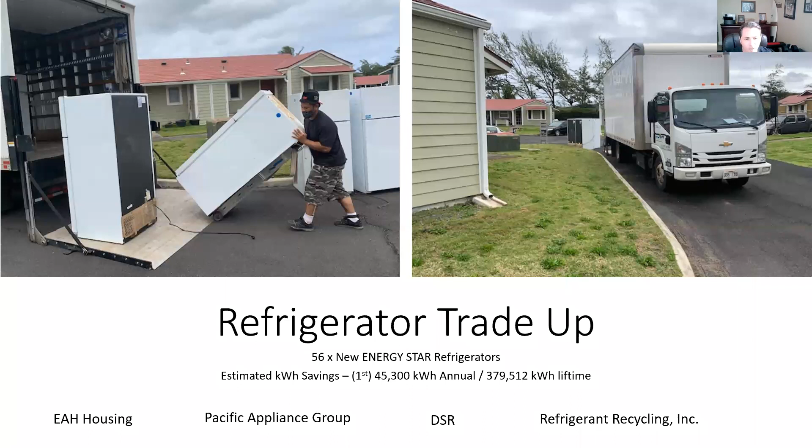So finally, I just wanted to share a few additional examples of some of the community-based energy efficiency efforts that we've done in the past. These 3 communities here basically were able to participate in all or most of the programs that I've just covered. In Kalihi Valley Homes, we not only did the Energy Smart for Homes, we also provided refrigerators, and of course the solar water heating tune-up. This is a large project, and over many, many months we were able to provide these types of efficiency efforts and measures. Molokai, that's the same thing.

We were able to start from the beginning and go through in Kunia Village, a facility that used to be the old pineapple plantation. It was built for ag workers, and HARC is the management over there, and they worked with us to really ensure that the residents had opportunities to save, because we're talking about older plantation style homes.

Next slide, please. So finally, just looking at the scope of these final projects, this is usually how we close out our efforts. For KVH, 75 solar water heating tune-ups, and in this case we subsidized most of the costs on that. For Kunia Village, we actually were able to provide all 43 of those heat pump retrofits at no cost, fully funded by Hawaii Energy. Same goes for Molokai, 29 solar water heating systems. It takes a lot of collaboration and work, but it's vastly rewarding, and I'm just happy to be able to be doing these types of things.